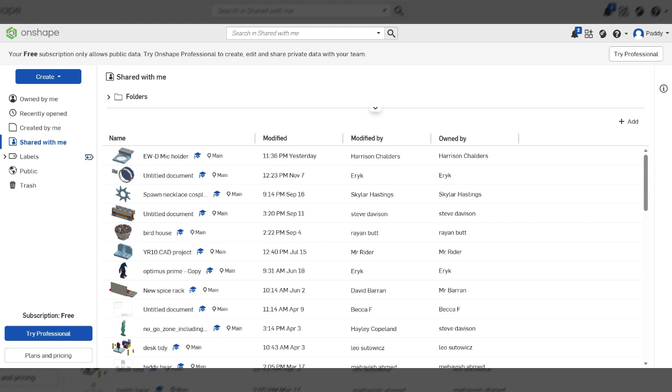So you might be thinking, why are we on Onshape when we're talking about freehand sketches? Well, we found that the best way to get year 10 or 11 students to produce freehand sketching is to make it on Onshape and trace the design off there once we've turned it into either a 2D or isometric view. So the first thing I'm going to do is create a new document.

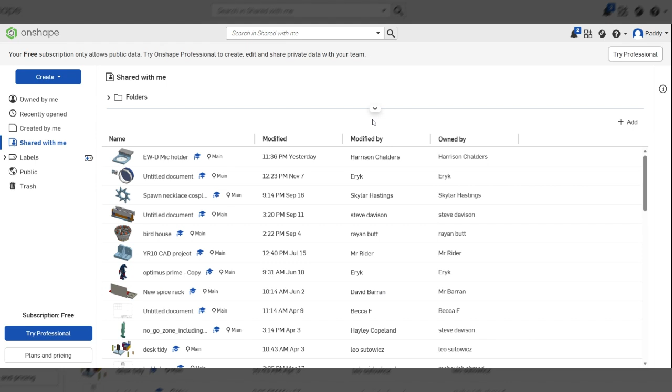I'm going to call it R039 photo frames. And here I'm going to be able to create my ideas. So the first thing I'm going to want to do, or get my class to do, or do if I'm a student and I'm not so confident at sketching, is I'm going to make my designs on Onshape and sketch them from my model as I go along.

Now, to start with, this is not the most difficult thing in the world, but the most important thing is you've got a range of ideas. That means some of them need to be wall mounted, some of them need to be freestanding. They can't just be a series of boxes or squares that might have photos in that are all the same, just arranged in different ways.

So the first thing I'm actually going to do is I'm going to look at standard photo sizes. Lots of pupils, when I did this, wanted to do hexagonal or round photos. I'm going to steer you away from that direction because most photos, by standard size, are square or rectangular. So if I'm looking at standard photo sizes, we're probably looking at either a 2 by 3 inch or a 4 by 6 inch. That's approximately A5 or A4 size.

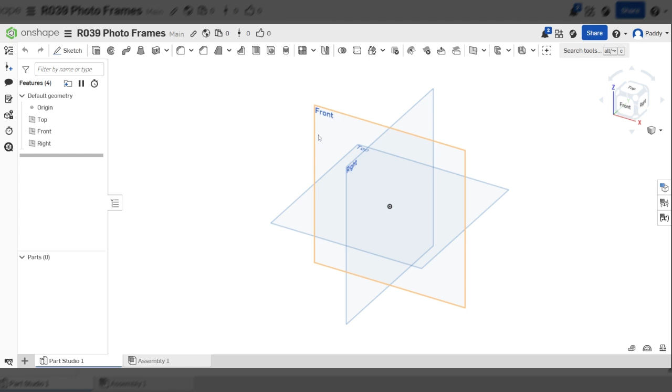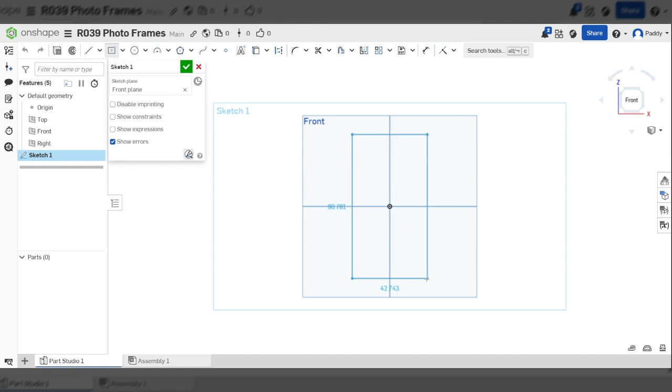So the first thing I'm going to do, I'm going to click on my front plane. I'm going to press N so that I'm facing my front plane. I'm going to click Sketch. I can either click the corner rectangle, which is your default rectangle tool, or if I click the drop down, I'm going to click the center point rectangle. And I want a portrait rectangle, so I'm going to make it about that size.

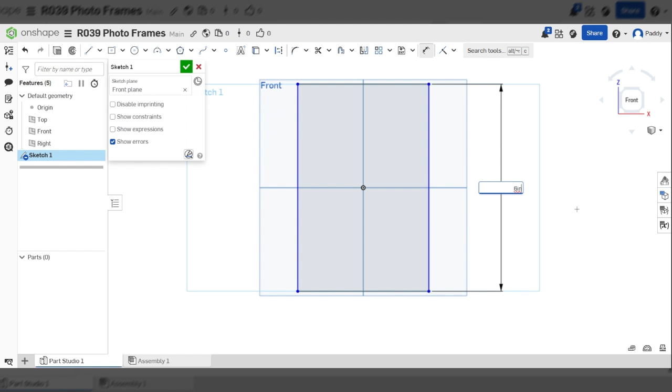Now, I have my dimension tool here, and all I need to do is click on an edge, move my cursor away from that edge, and click the dimension to drop it. Now, what you will notice is that mine is set up in millimeters rather than inches. That's fine. What I'm going to do is make an A4 photo. So I'm just going to type 6. If I just type in 6 in, you'll see the dimension comes down. It recognises inches, and if I click that and press enter, even though I've clicked in 6 inches, it's set that to 152.4 millimeters, so that's about 15 centimeters.

I'm going to click the bottom line, and click 4 inches - that's about 10 cents. It's not quite A4, but now we've got the size of our photo.

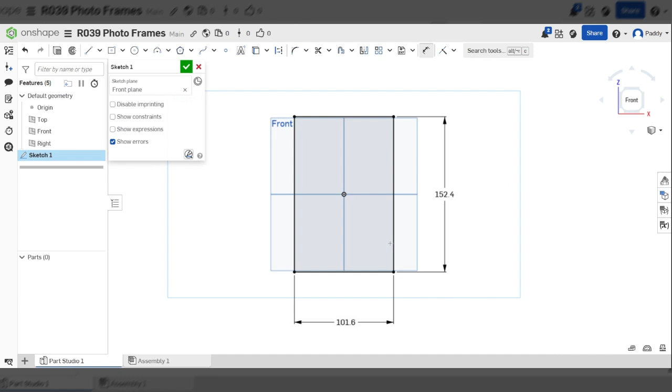What I'm going to do now is use the offset tool. I could draw another rectangle and redimension it, but instead I'm going to click and drag around everything. This brings out a border around it, and I'm going to set that border to 10 mil. So to make sure I've got exactly 10, I'll set that dimension, and when I've done that, I'll see the line is black.

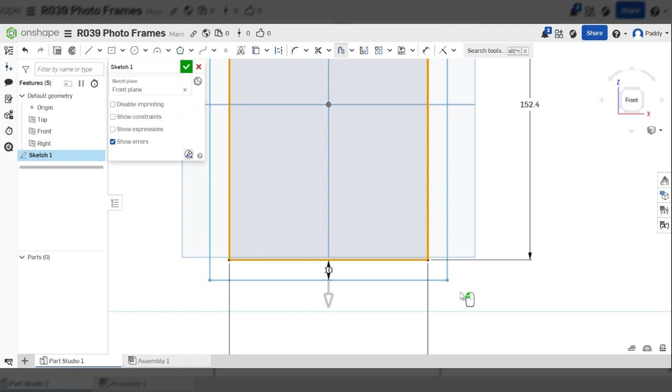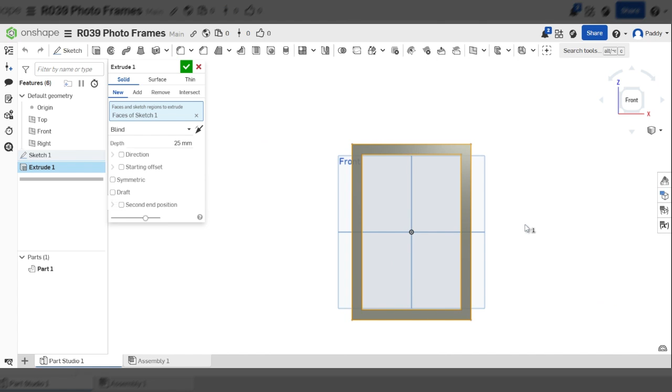I'm just going to go into this white space over here - it says give it a green tick on the left mouse button when I'm ready. I'll do that, and I've got a border around it. All I need to do then is go over here and press the extrude tool. I'm going to extrude it by probably, let's say 8. And I've got a rectangle that I can use for my frame, which when we get into our development stage, we're going to add some glass and a backboard onto it, and I'll show you how to do that.

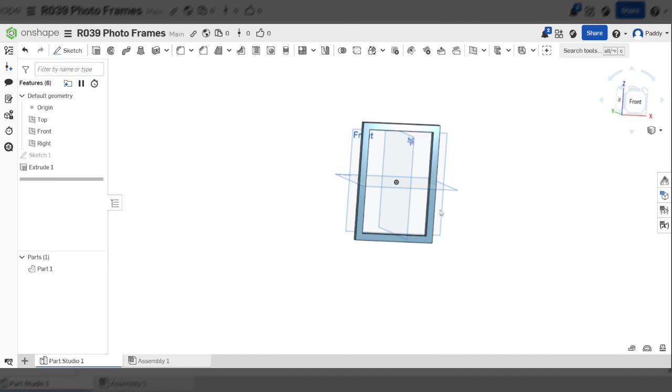So we've got one display, one photo in our display. What we need to do now is come up with an idea to put another one in. So I'm going to click on my front frame again and just draw another rectangle - this time I'm going to do a corner rectangle.

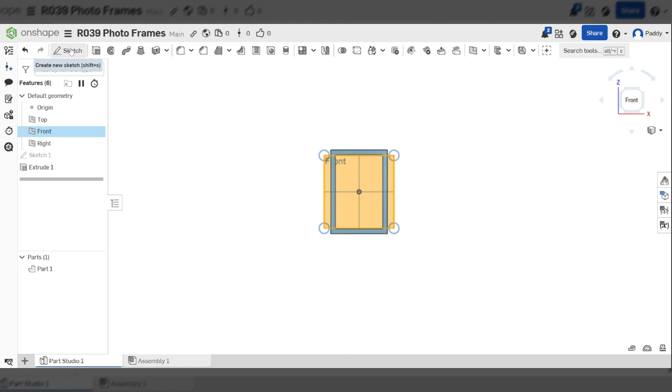And I'm going to do it there, and I'm going to make this one a little bit smaller - so I'm going to make this 2 inches by 3 inches. No, I'm not, because that does look a little bit small to have behind. I'm going to make it 4 by 6 again.

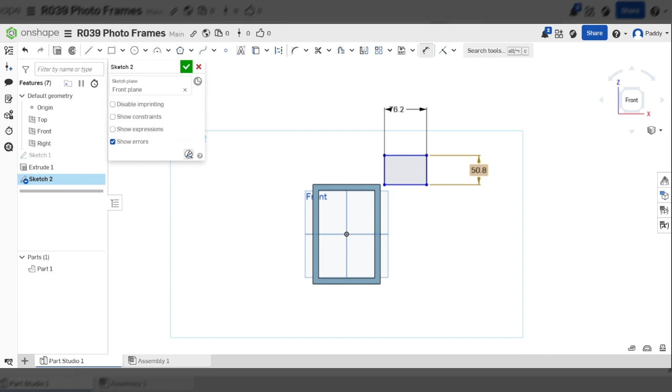Remember, the photo frames can be the same size or different sizes as each other. Now it's moved over here. What I can do is - where's the linear pattern here? I've got 1, 2, 3, 4 squares.

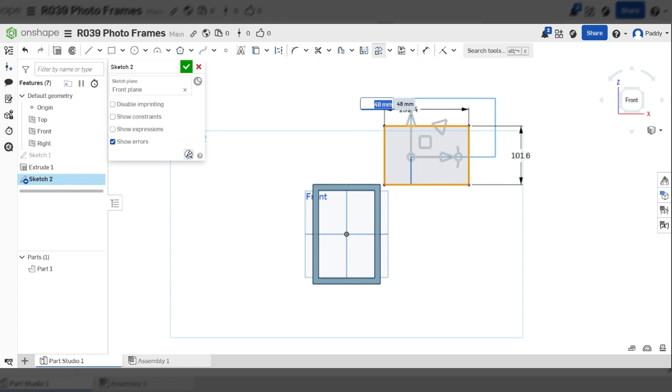I'm going to click the drop down and click transform. I'm going to click and drag around this, and I've got these handlebars that I can use to move it - I can move it up and down. Since I'm not too fussed about the exact placement, which I could type in this box, I'm going to grab this square and just move it somewhere behind my shape, so it's just overlapping - we've got that overlap to attach it to.

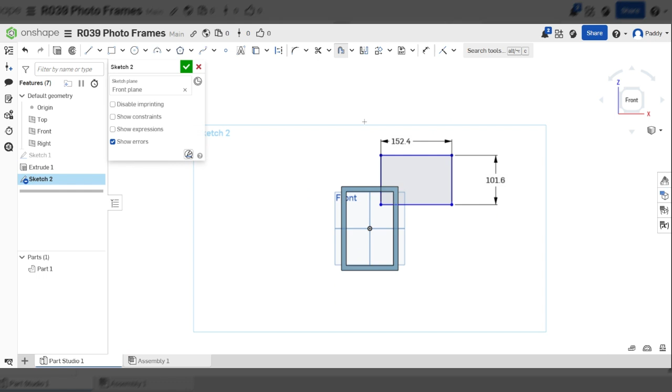I'm going to click the tick, and again use my offset tool, highlight everything, pull it out, set my dimension to 10. I can do that just by clicking on the dimension, double clicking. It's not liking that for some reason - try it again, this time I'm going to just individually click round. There we go.

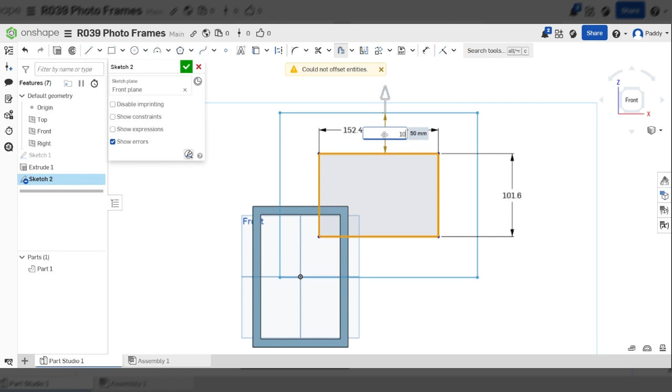I'm going to pull it out, double click where it says 50 there, and change that to 10. Then click in some white space and extrude it. The difference is this time I'm going to extrude it in the opposite direction, set it to 8 again. So now if I look at the right view, they're touching, they're overlapping.

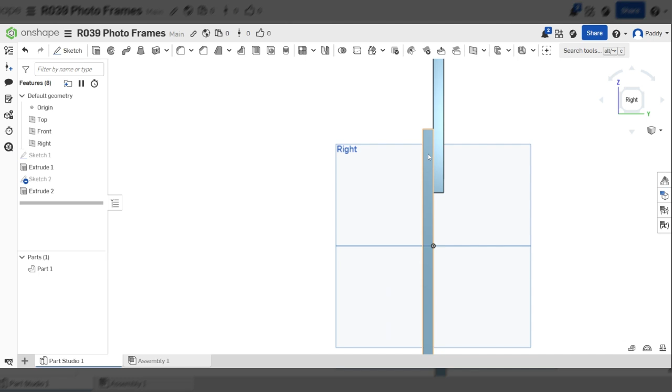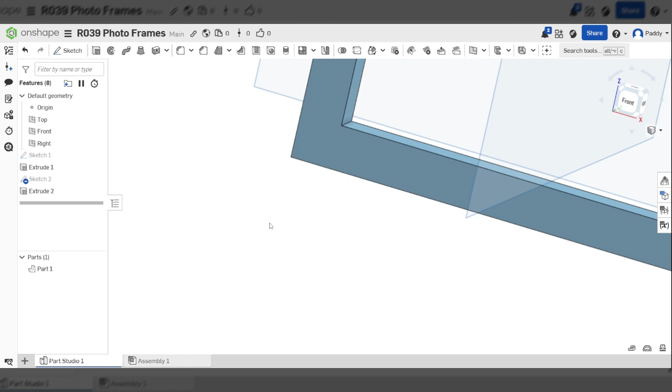All I'm going to do now is exactly the same, but I'm going to do one down here, so I'm going to do this on not the front plane this time. I've gone forward and backwards on the front plane - I can actually extrude from any or sketch on any flat surface. So I've extruded out this flat surface here.

And again, I'm going to sketch a small rectangle here. I'm going to do the 2 by 3 inch.

Just going to move it so it's overlapping a tad more.

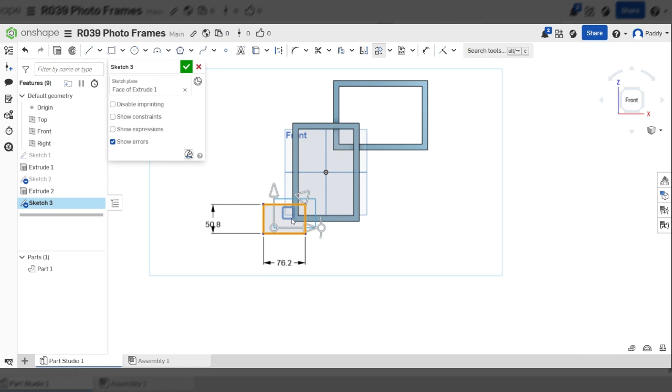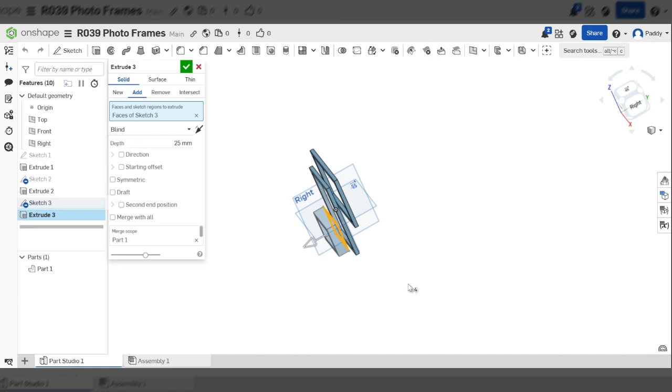Use my offset tool. Extrude - I'm going to make sure I'm extruding out this way. I don't want it going in and through and clipping and colliding with the frame I've already got. 8mm.

Here, I'm quite happy with this display. I've got 3 photos. They don't have to be different sizes, but they are. It looks quite interesting - they're overlapping, in different orientations. The only thing is, on criteria point 1 of the specification, it says it needs to be aesthetically pleasing or decorative.

It's quite aesthetically pleasing, quite interesting, but I am going to add some decorations on. With decorations, what I mean is I'm just going to add some bits that make it look a bit fun, a bit wacky.

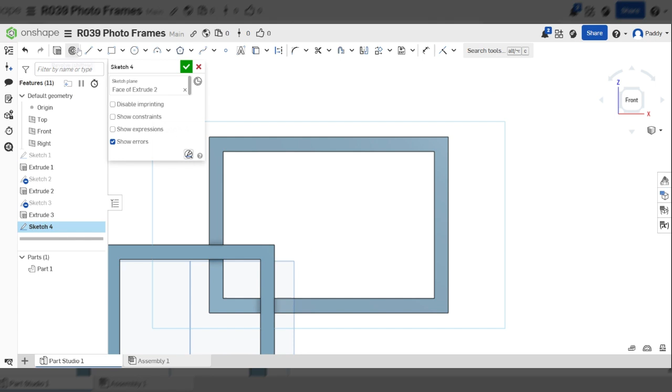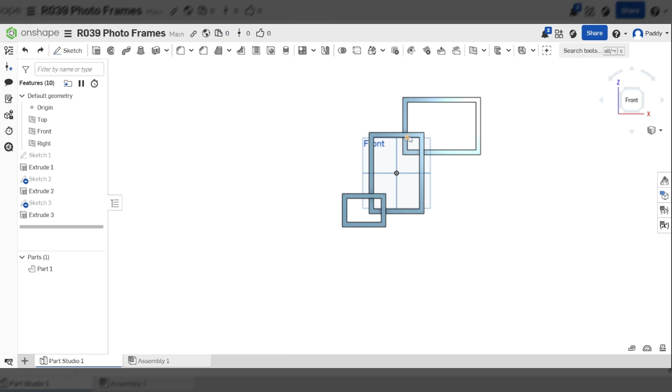So what I'm going to do, I could either add just shapes or things that come off the corners, maybe that don't intrude the actual visual of the third frame too much - just sit and clip the corners off to improve that image. What I'm going to do is put a bit of a backboard around my back one just to emphasize it.

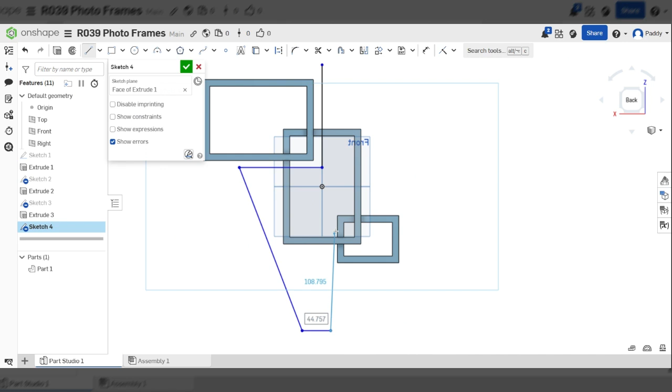So what I mean by that is I'm going to use my line tool. I'm just going to put an interesting shape there, and I am going to dimension it because I'm very OCD. I'm going to set that to 10 just to make sure these lines are the same distance.

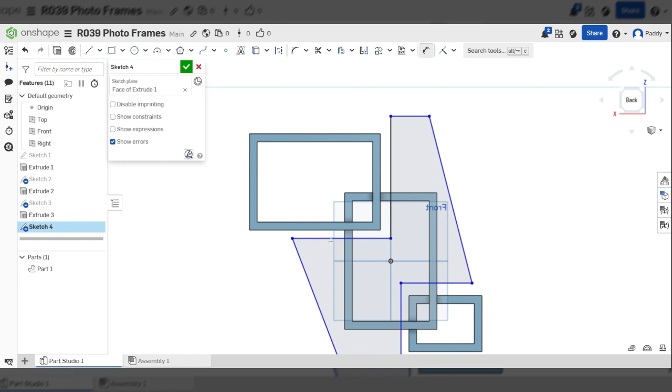Now we can't actually move that line because it is snapped to the center. So what I'm going to do - what is it, it's about 14 - I'm just going to make sure that all my lines are about 14mm away from each of my frames.

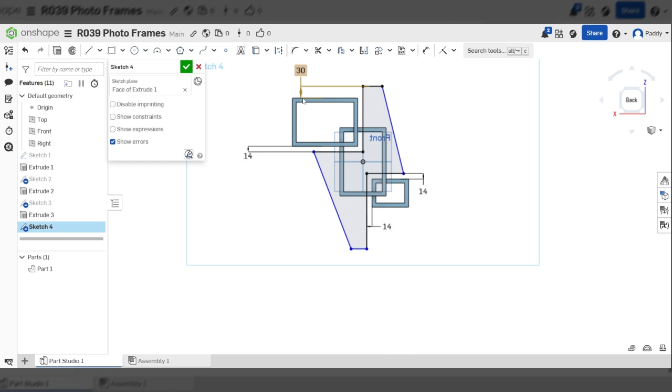I want that to be a bit big. Maybe I'll put that to 30, so it's sitting proud of that. Change it to 40. Now I've got quite a dramatic, almost lightning bolt sort of shape here.

I'm going to extrude that back by 8. And I've got what looks like a very nice design that I'm somewhat happy with.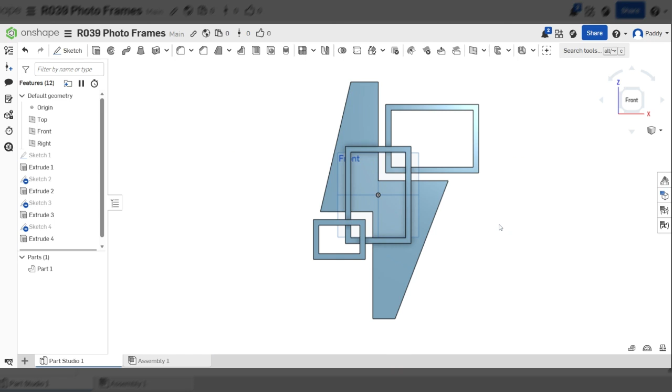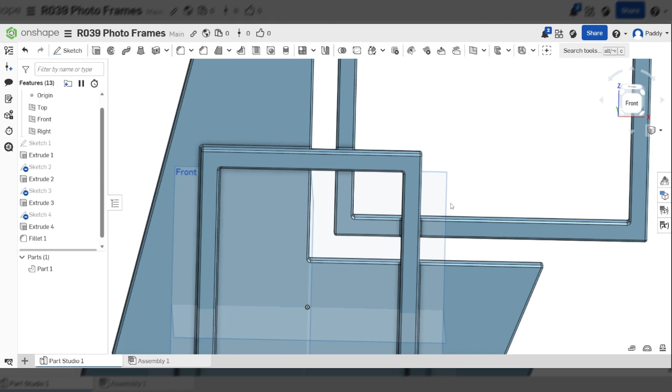Now, when we come to our development and we need to figure out how we're going to get our photo frames in and out, we are going to alter this slightly. But for now, for an idea, you might want to add some fillets on it as well. If you select everything and put a 1mm fillet on all your lines, it might be more difficult to sketch, but what that does is just round off all the corners and edges.

I'm going to make it more - you probably don't want to do it much more than 1mm. If I do 2mm, it becomes a little bit more obvious.

But what I'm going to do now - I'm happy with my design, so I'm going to get rid of my fillet because I don't think I can draw something that closely. I'm going to click this box here.

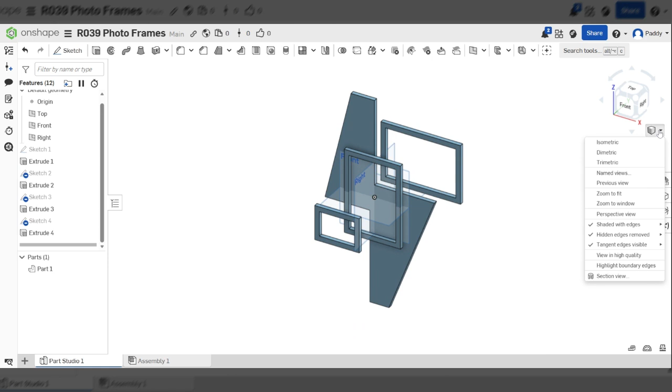That puts me into a dimetric view. What I'm going to do is click this box here, go to isometric. I'm going to zoom in so my design fills the page.

What you're going to do now is just get some masking tape, stick a piece of paper over that and go around it, tracing it using your laptop or computer screen as a guide.